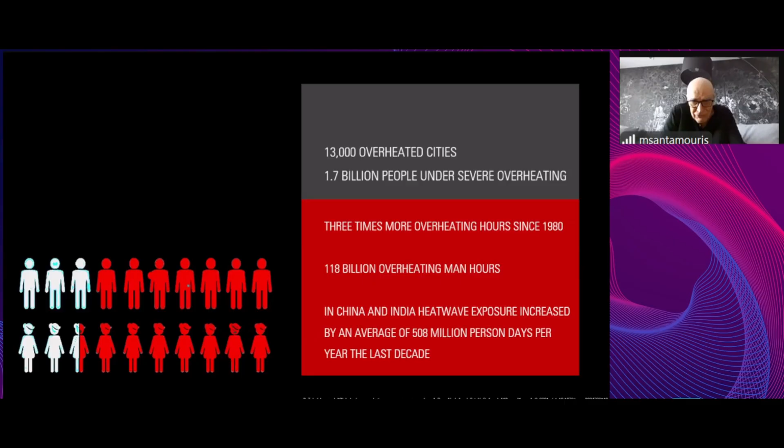Next one, please. To understand the impact of regional or urban overheating compared to global climatic change, I made the following graph. I just plotted the number of cooling degree hours in a coastal meteorological station in Sydney, which is not influenced at all by urbanization.

In the 90s, the number of cooling degree hours in that station was close to 820. In our days, the number of cooling degree hours in the same station, without urbanization, has increased by about 33%. This is the impact of global climatic change. But once we move into the center of the city of Sydney, the number of cooling degree hours increased by 81% compared to the coastal station. And this is the impact of urbanization.

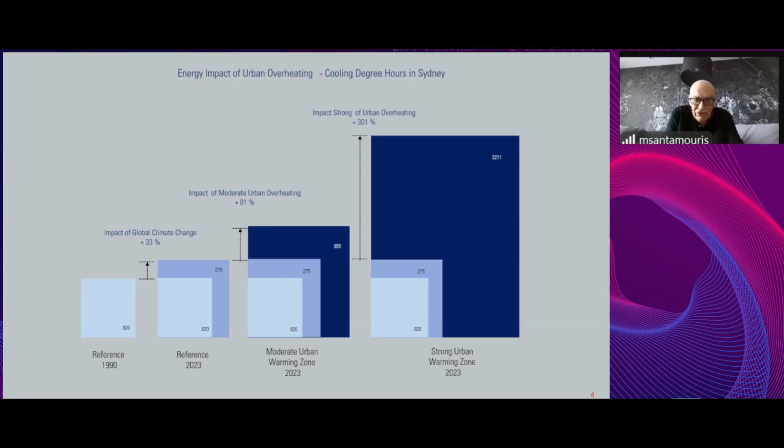And unfortunately, when we calculate the cooling degree hours in the western part of Sydney, which presents the highest problem of overheating, the number of cooling degree hours increased by 300%. So you understand that in a city, within a distance of about 50 kilometers, we have a tremendous difference in cooling degree hours or cooling needs or overheating. The impact of global climatic change is close to 30%, while the real impact of the local climatic change of city overheating is close to 300%. Next one, please.

Which is the impact of the higher temperature in cities? First, it increases the energy consumption for cooling purposes. Also, it decreases the efficiency of power plants. Another very important problem has to do with the increase of peak electricity demand, which obliges utilities to build additional power plants. It also has important environmental problems: it increases the emission of pollutants from power plants, increases the concentration of ozone, and affects heat-related mortality and morbidity, as well as mental health problems.

But it also has an important impact on our social life, because it lowers the productivity of the population, increases the risk of accidents, and affects the survivability of vulnerable populations. Next one, please.

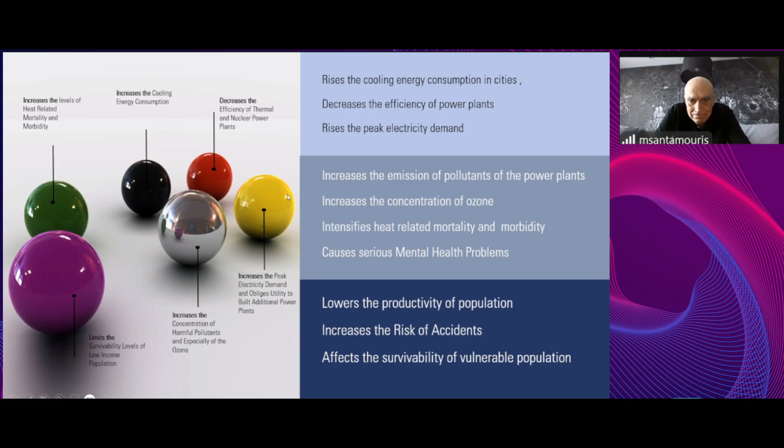Do we have enough evidence about the impact of urban overheating? Yes. As it concerns energy consumption, we know that on average, urban overheating causes an energy penalty close to 240 kilowatt-hours per person. In some cities the penalty is higher, in others a little lower. So each one of us has to pay close to 240 kilowatt-hours per person because of the overheating of cities. On the other hand, peak electricity demand is increasing tremendously because of the very important penetration of air conditioning during the hot period.

This obliges utilities to build additional power plants to satisfy the demand, and of course this increases the cost of electricity. At the same time, we know very well that for each degree of temperature increase, the efficiency and power output of thermal and nuclear power plants decreases by 0.6%, which means that during a day of heat wave, the decrease of efficiency of power plants is really close to 6%, which is really very, very high. Next one, please.

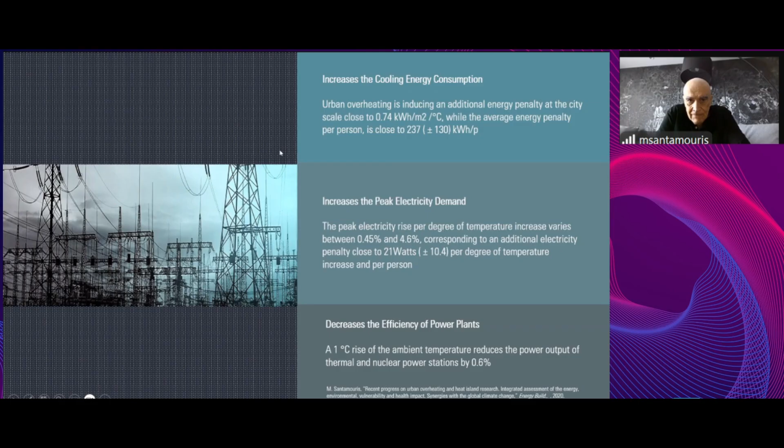The problem of higher demand for electricity during heat waves started to be a very serious problem during the last period. Why? Because during heat waves, most nuclear and thermal stations have no possibility for cooling, since the temperature of the rivers and lakes used for cooling increases and cannot be used for that purpose. Under these conditions, the output of these stations is very limited or even zero, and this results in a tremendous increase in the price of electricity.

During heat waves in the last few years in Europe, the spot price of electricity per megawatt hour increased by about 10 times during these periods, and of course this cost is transferred to the consumers.

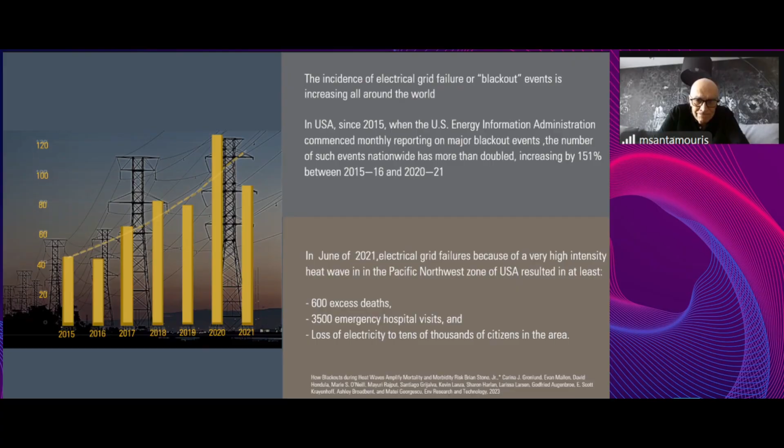As part of the energy problem, urban overheating very much affects the concentration of pollutants in the atmosphere, mainly ozone. This is the result of photochemical reactions in the atmosphere, which are accelerated by high temperature and high solar radiation. Ozone is a toxic gas that creates a serious problem and perhaps a very serious number of deaths per year.

According to the World Health Organization, we may have about 600,000 additional deaths per year because of the increased concentration of ozone in the world. Next one, please.

Apart from the serious increase in ozone concentration caused by urban overheating, the extended use of power plants increases the emission and release of pollutants by the power stations. For each degree of temperature increase, the release of pollutants by power plants increases by close to 3.5% per degree, which means that during a day with overheating of 10 degrees, we may have 35% more pollutants emitted by power plants. Next one, please.

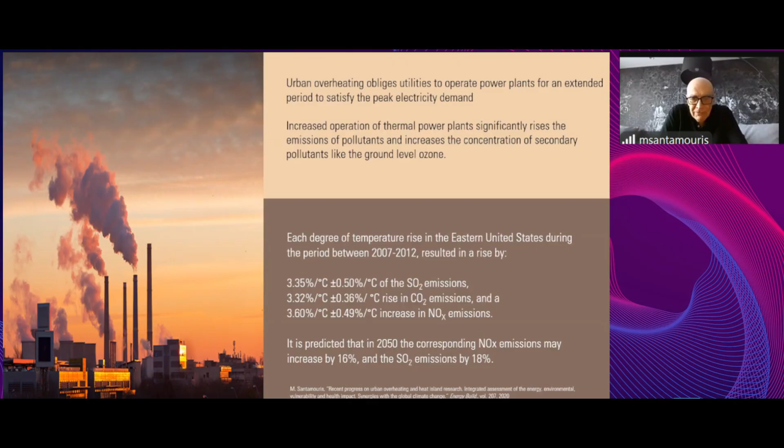So unfortunately, the energy and environmental problems are not the only problems we face because of overheating. The problem faced by the low-income population caused by high temperature in cities is a very serious problem. Unfortunately, low-income population lives in deprived urban areas with very high overheating. Also, the quality of housing for low-income population is not proper, and this creates an important indoor overheating problem. The lack of resources to compensate for the overheating puts these people under stress.

It's characteristic that in Portugal, a very developed country of the European Union, low-income population can cover only 2% of their cooling needs. Next one, please.

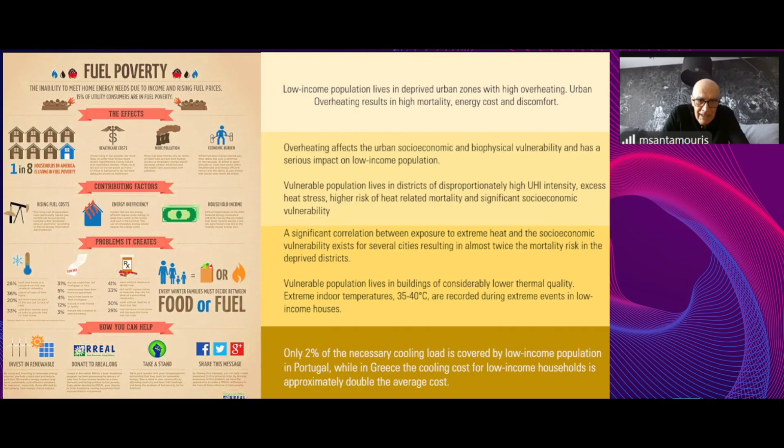A lot of measurements and monitoring campaigns performed in low-income households during heat waves or warm periods have shown that low-income population is living under very high temperatures. You see, for example, results of recent monitoring in Western Sydney, showing that people used to live under 40 degrees during a heat wave.

Unfortunately, because they try to protect themselves by closing doors and windows, the indoor concentration of pollutants was 3 to 4 times higher than the threshold. So because of overheating, low-income population is living under tremendous stress, very high temperatures, and also very high indoor pollution. Next one, please.

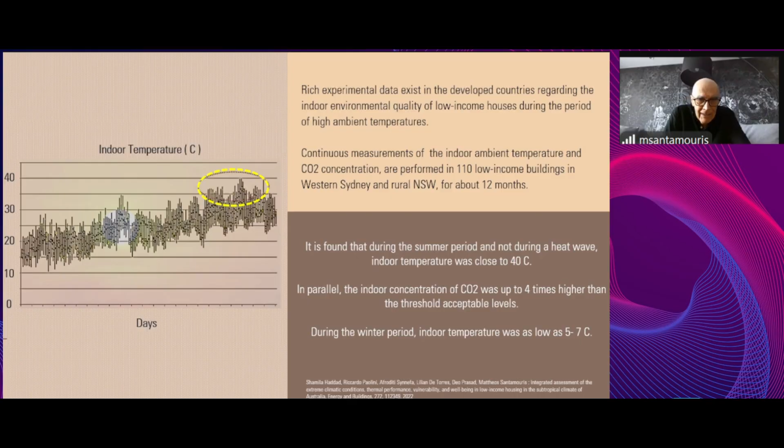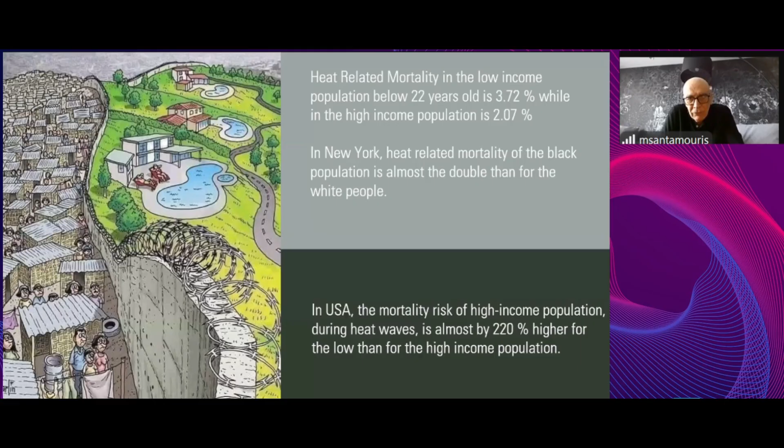This brings us to the very serious problem of the impact of overheating on health. We know very well that when the human body is exposed to temperatures beyond a certain threshold, the thermoregulation system cannot offset the impact of extreme heat, and this results in increased global mortality and morbidity.

Who is really affected by that? Elderly and young population are the most vulnerable groups. Also those with pre-existing health problems like respiratory, cardiovascular, or mental health problems, those using medication, and those who lack economic assets and local infrastructure.

Is heat-related mortality and morbidity because of overheating a serious problem? Yes. In Europe, heat-related mortality for the population above 65 years old has increased by 85% between 2004 and 2021. So this is a very serious problem. According to the World Health Organization, the magnitude of heat-related mortality in the world is close to 500,000 persons per year. So we are losing 500,000 people per year because of overheating.

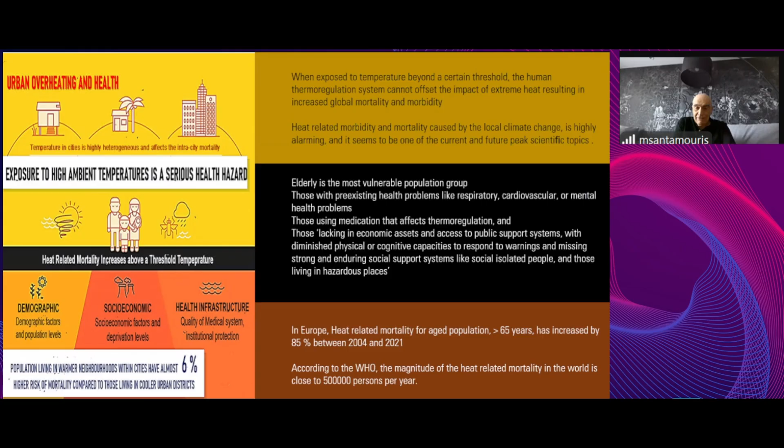What about the future? The actual forecast by official institutions in the world shows that in Southeast Asia, South America, Africa, and South Europe, there is going to be a tremendous increase of heat-related mortality because of overheating. This has to do with many parameters, and we hope this will not happen. But unfortunately, the continuous increase of temperature, the overpopulation, and the lack of proper standards in these areas bring us to such a high number.

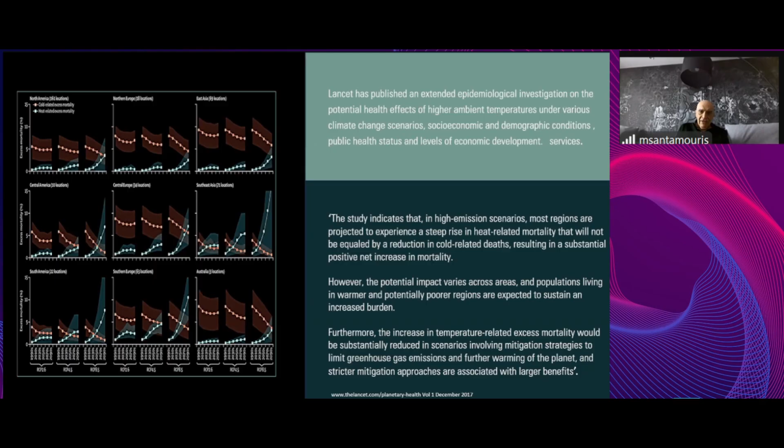Let's say that this is going to be one of the major problems in specific areas. We know that during periods of high temperature, human aggressivity increases tremendously. The number of crimes committed during hot periods increases by a factor of 6 or 7 compared to the rest of the year.

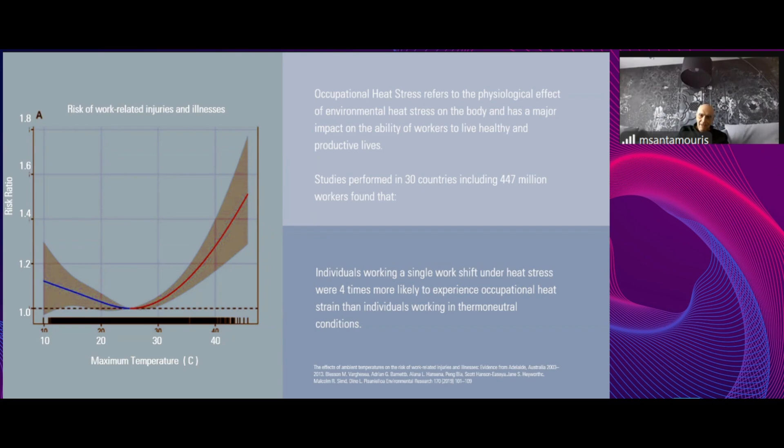Just to understand the impact of the economic and financial loss from overheating and loss of working time: in the United States, they are losing about 100 billion annually from heat-induced loss of labor productivity. And it is expected that the economy will have about 23% lower income by 2100, by the end of the century, because of decreased labor productivity. This mainly happens in the third countries, the less developed countries, where people work mainly outdoors.

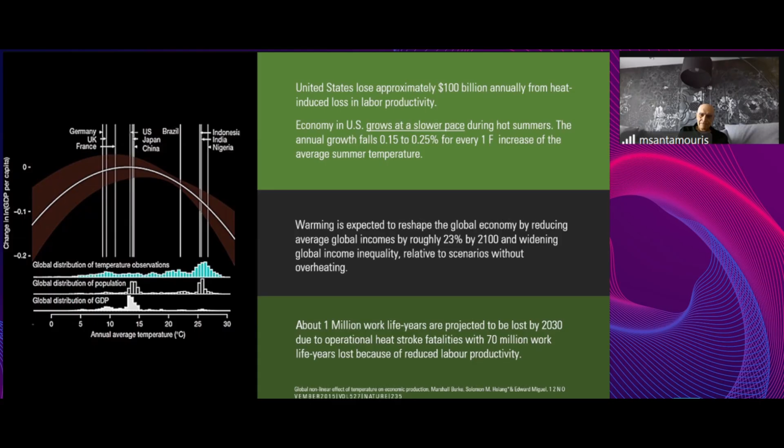Recent studies performed using many millions of people have shown that human productivity is decreasing by about 60% above 30 degrees. When temperature is higher than 30 degrees and goes close to 40 degrees, which is very common in Southeast Asia, human productivity may decrease up to 60%. So it is very simple to understand the economic impact this has on countries and also on families because of the loss of productivity.

A very recent study by the International Labour Organization showed the total work time expected to be lost, especially in the developing countries, because of overheating. Officially, according to the International Labour Organization, temperatures close to 40 degrees, very common in cities in Southeast Asia, may cause a decrease of by 70%.

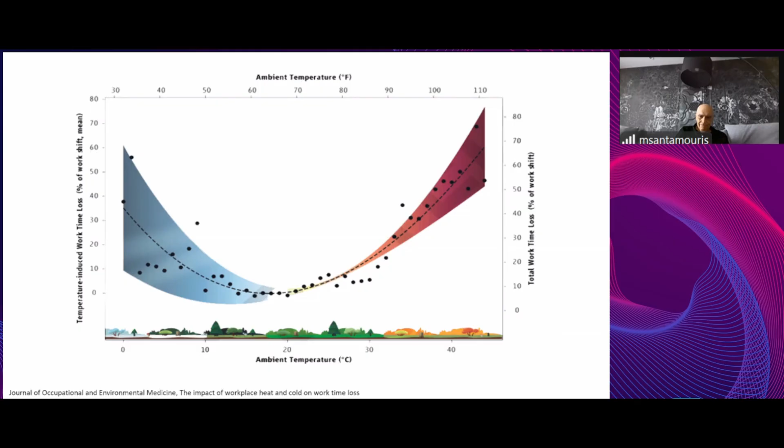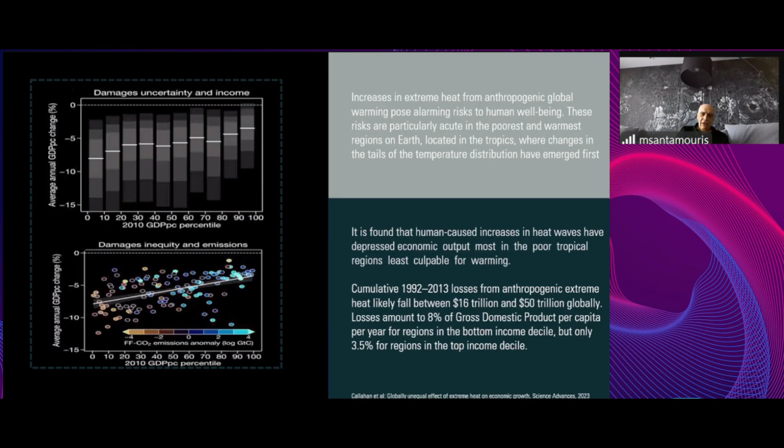Unfortunately, this affects mainly countries with less income, developing countries, countries that are not responsible for climatic change. So those that are paying the penalty of climatic change are those that are not responsible, that have not caused the problem. Recent forecasts show that these countries will be affected financially, but not only financially, also from the social and technological point of view in the future.

What about the future? The actual forecast we have about future temperature in our cities shows that we may expect an increase of the nighttime temperature between 3 to 5 degrees, not the same everywhere, but this is the average. And also, we are expecting an increase of the daytime temperature between 1 to 2 degrees. So in the future, we may have much higher temperatures during the night, and higher temperatures during the daytime as well.

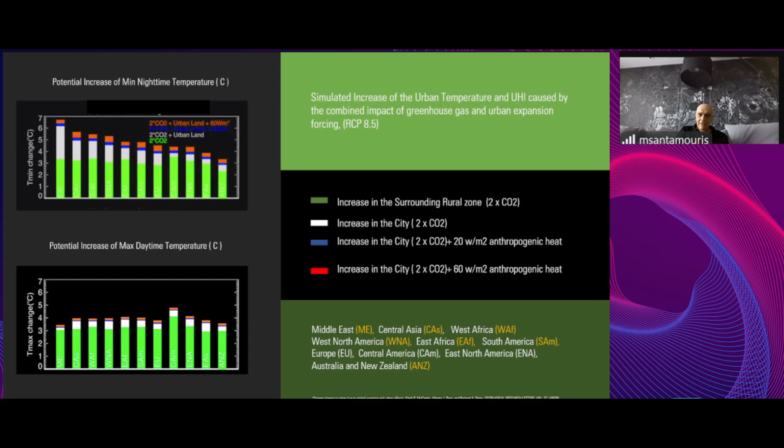This brings us to a very serious problem regarding mainly low-income population. Why? About 9% of the global population is living out of the so-called human climate niche, which is the range of temperature where human civilization developed. 9% of the global population today is living outside this range, under temperature conditions we never had before. And of course, this may increase up to 40% in the future under specific conditions.

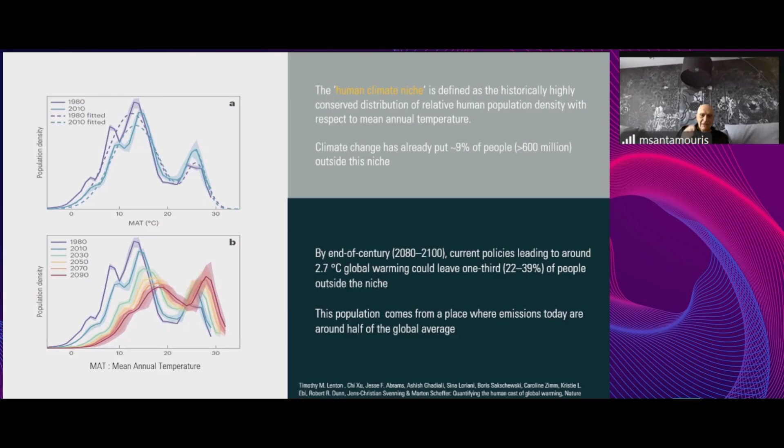This will happen in very specific countries: India, Nigeria, Indonesia, Philippines, Pakistan, etc. In these countries, we may expect a tremendous increase of the temperature, because of the combination of the global and local climatic change.

This will affect mainly low-income population. Just to understand, in the countries and cities of Southeast Asia, we have about 86 days on average above 35 degrees. An increase of the temperature by 2 degrees will increase this figure to about 105, or an increase by 3 degrees, very probably, to 134.

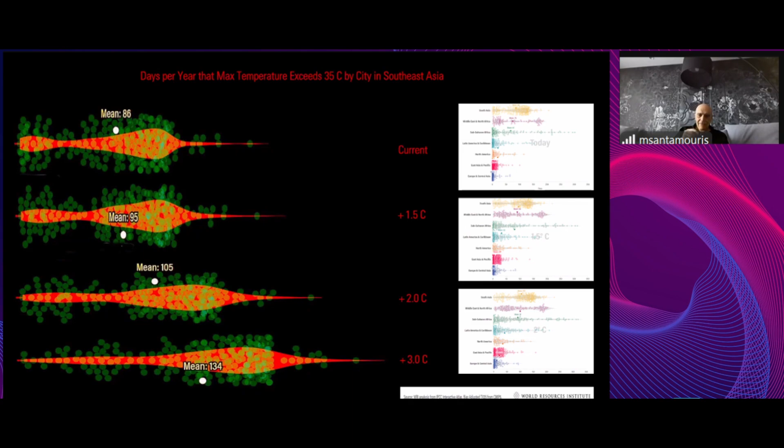But this is going to affect mainly the low-income population, because low-income population experiences 83 days above 35 degrees, while high-income population has only 16 days above 35 degrees. So the problem is that in many cities in Southeast Asia mainly, but not only Southeast Asia, we expect a tremendous increase of the temperature. We expect also a very serious problem for low-income population.

Under different scenarios, the situation may be extremely serious, but we like to believe that these scenarios will not really happen, because it shows that perhaps the increase of the population living outside the actual temperature range in Southeast Asia may increase by 150%.

I hate this forecast, but unfortunately this brings us to the reality of the actual construction situation. There is currently a shortfall of about 330 million homes in the world. And in our days, this has increased to about 440 million. We build a lot, but we don't build with the proper standards. To understand really how much we build, I have to tell you that we add a total floor area equal to the city of Paris per week.

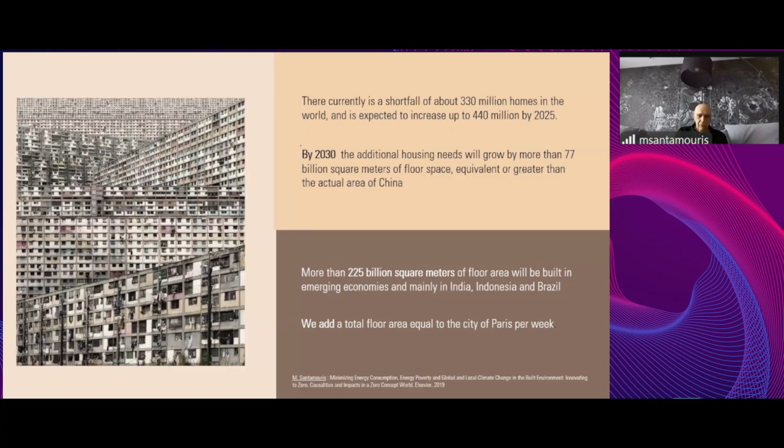And many people just mention that, okay, higher temperatures, low-income population, no problem, we have air conditioning. Actually, air conditioning is not really an important part of the building's energy balance. It's about 14–15%. But by 2050, it is expected that the need for air conditioning may increase up to 2,000%. Why? Because of the overheating and because of the overpopulation.

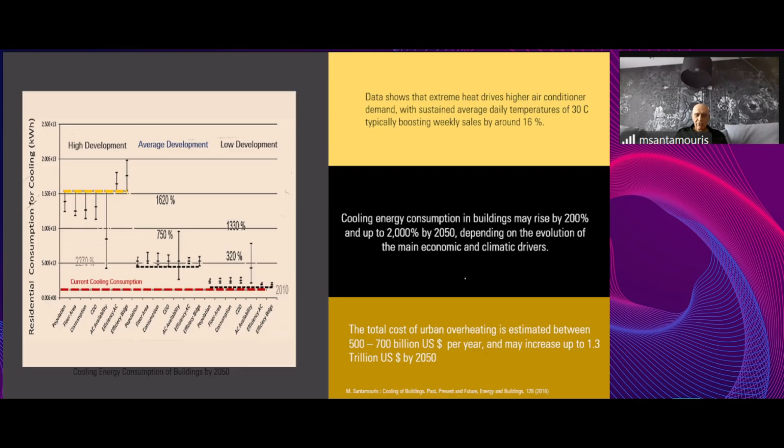Forecast shows that the total cooling energy consumption of a single Indian city, Mumbai, may be higher than the total electricity consumption of the whole United States. So you understand what is going to happen in these cities, and I will come back to this and explain to you what is happening today. Next one, please.

And other very recent studies have shown that in low-income population, the penetration of air conditioning, these are results from Brazil, is almost zero. They try to cool their houses or to have access to comfort using other techniques. So air conditioning is not really a solution for the low-income population and cannot compensate the tremendous increase of the population and also the tremendous increase of the overheating. Next one, please.

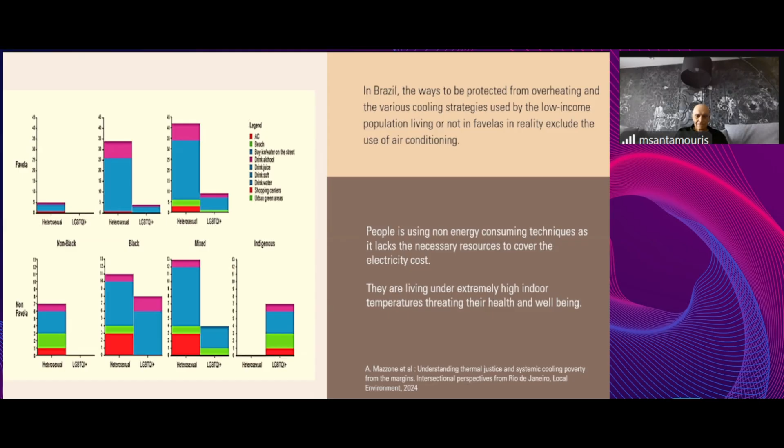And of course, this creates a tremendous stratification in the world. Countries with higher income pay much less. The cost per family is much lower than in the countries with lower income. And why? Because of the quality of the electricity infrastructure, the quality of the housing, and many social, financial, and technological problems. The cost of air conditioning in the low-income countries is much, much higher than in the developed countries. Next one, please.

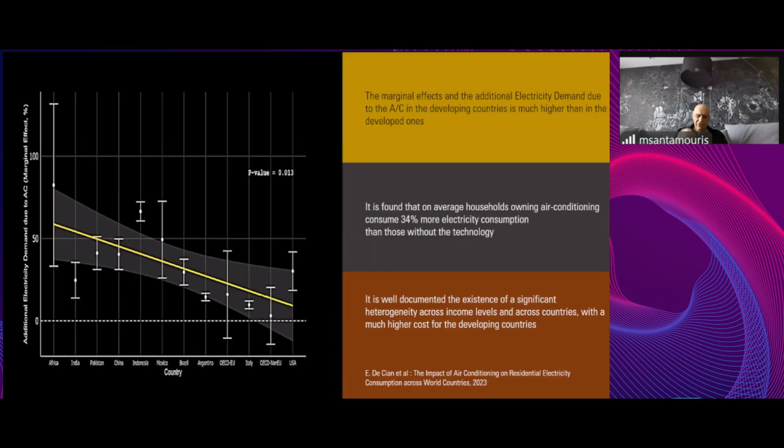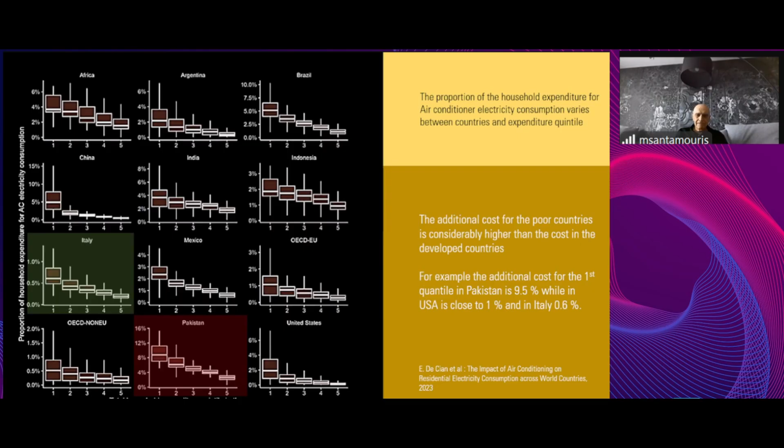Because speaking about the future, some people may say, okay, we believe or we don't believe. I'd like to show you what is actually happening in India. In India, since April 2023, and in most parts of Southeast Asia, there is a continuous heat wave, very high temperature. Because of the very high temperature, low-income population tried to have access to comfort. And it's not so difficult or expensive to buy an air conditioner because of the market created by the air conditioning industry. You can easily buy an air conditioner. The problem is how to operate it.

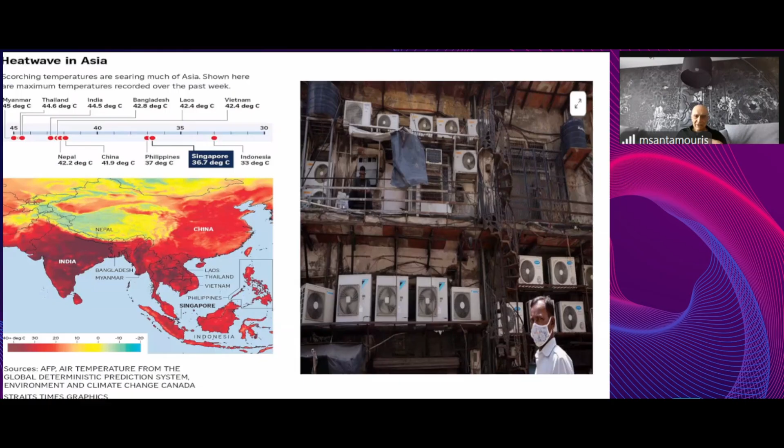Next one, please. As a result of this tremendous penetration during the last 2 years in India, the peak electricity demand in India has increased by 15.2%. This is an incredible percentage. There is no country in the world that can increase its capacity and power output by 15.2% per year. 15.2% per year new power plants.

Who can do that? What is the cost? Which kind of fuel? What is really the total cost of electricity? What about the emissions? What about the release of pollutants? It is impossible really to continue this way. As a result of this tremendous increase of electricity caused by the penetration of air conditioning, next one please. No, previous, can you go back one?

Thank you. The provision of electricity in Indian cities during heat waves is just for 3 or 4 hours per day. So you understand that you can buy an air conditioner, but you don't have electricity, because the tremendous infrastructure which is required, the tremendous cost, and the failures of the grid do not allow it to provide comfort. So air conditioning is not really the solution for the future if we don't have other proper measures at the same time. These are the bad news.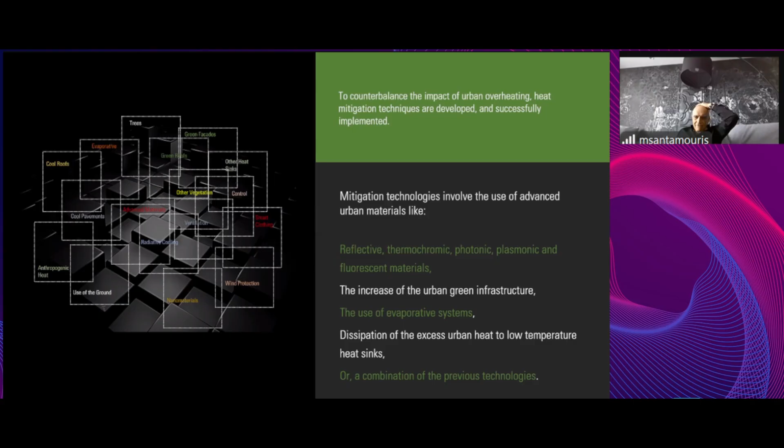But I would like to refer to very recent developments related to the development of the so-called supercool materials. These supercool materials, or photonic materials, are materials which present a very high reflectance to solar radiation, 96-97%, but the most important optical characteristic has to do with the emission of these materials. These materials emit in wavelengths corresponding to the atmospheric window.

The atmospheric window, 8 to 13 micrometers, allows the radiation coming from the ground to escape to space. So these materials can send the excess heat directly to space. So they can develop surface temperatures below the ambient one. Next one, please.

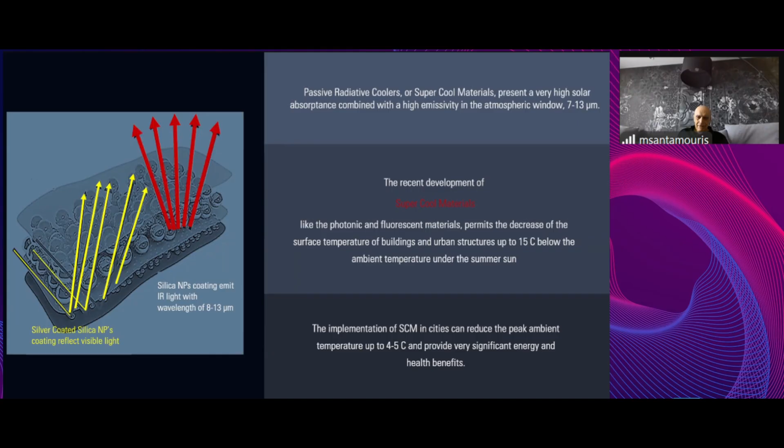At the University of New South Wales, we have developed these supercool materials. I don't want to go through the details. I would like to show the results. Next one, please. These materials are tested under Australian desert conditions. Very high temperature, very high solar radiation. Next one.

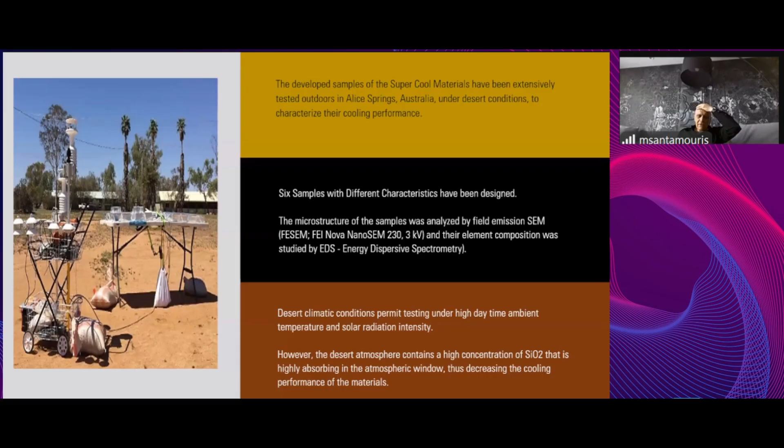And during the day, under the sun, during the summer, in the Australian desert, these materials present almost 6 degrees lower surface temperature than the ambient one. So these materials are natural air conditioners. Next one, please.

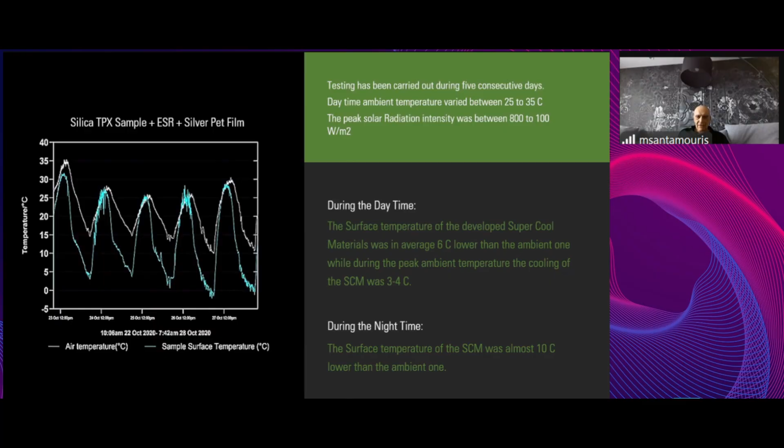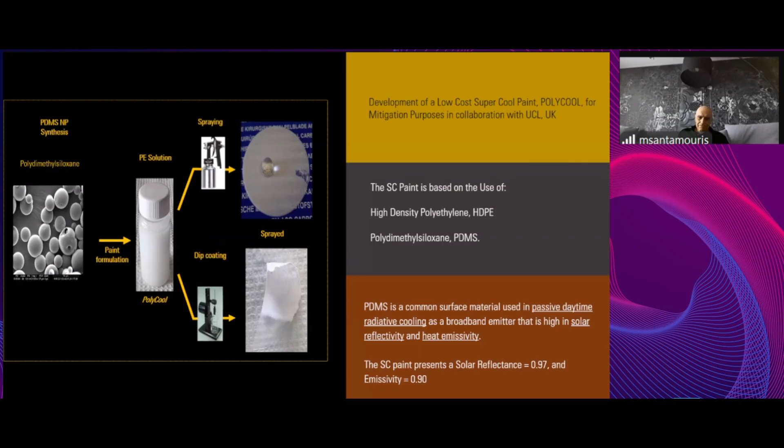And recently, together with UCL in London, we have developed very cheap supercool materials in the form of paints, which are also tested, next one please, and these paints applied on the roof of a house may present, under the sun during the summer, almost 7-8 degrees lower surface temperature, contributing to much lower indoor temperature and of course much better thermal comfort. Next one please.

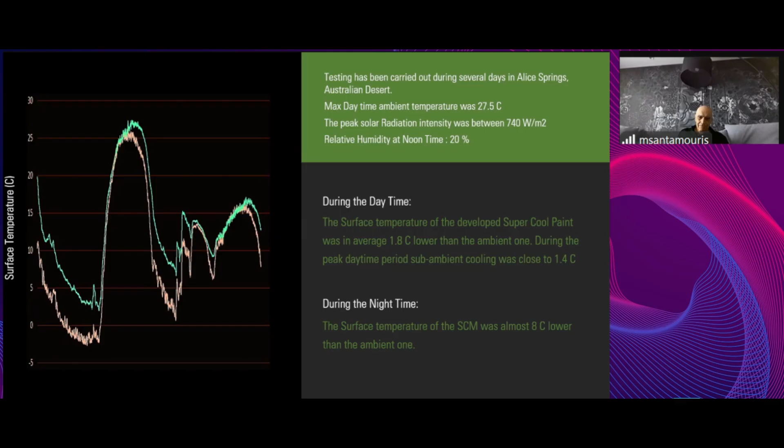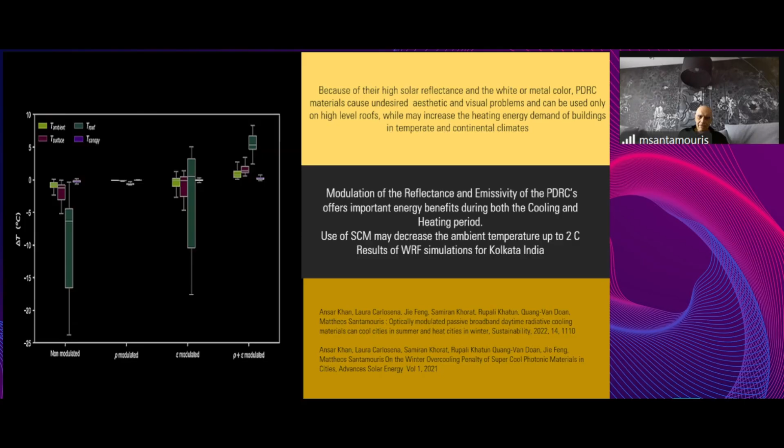Unfortunately, these supercool materials present very high reflectance. So these materials can be used only on the roofs of buildings, because if used on vertical surfaces they may cause problems of glare, contrast, etc. In order to solve this problem, next one please, we try to decrease the reflectance of the materials and compensate the loss of reflectance by using another cooling mechanism.

And we use fluorescence. Fluorescent materials absorb radiation, but immediately they emit most of the radiation in other wavelengths. So their thermal balance can be close to zero. The combination, next one please, of photonic with fluorescent materials gives us colored photonic supercool materials. Materials which have any color you may wish and present much lower surface temperature. Next one please.

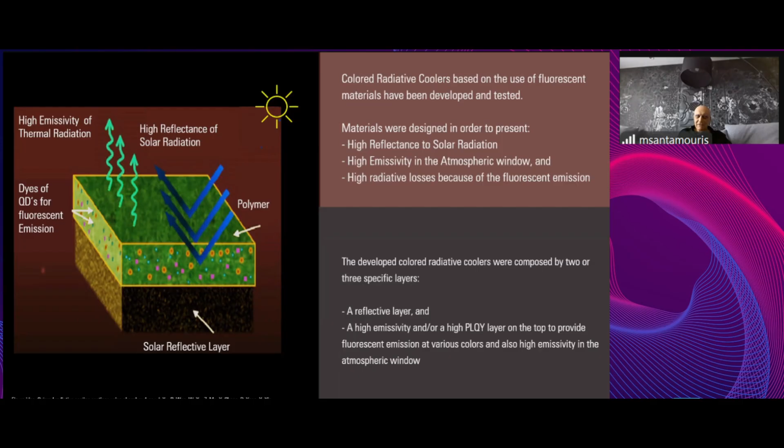We have tested this material under the Australian desert conditions, and you can see, for example, that a colored material, for example, a green material, presents almost the same surface temperature as a white, high reflectance photonic material. So now we can have color materials which present 8 to 9 degrees lower surface temperature than the ambient one.

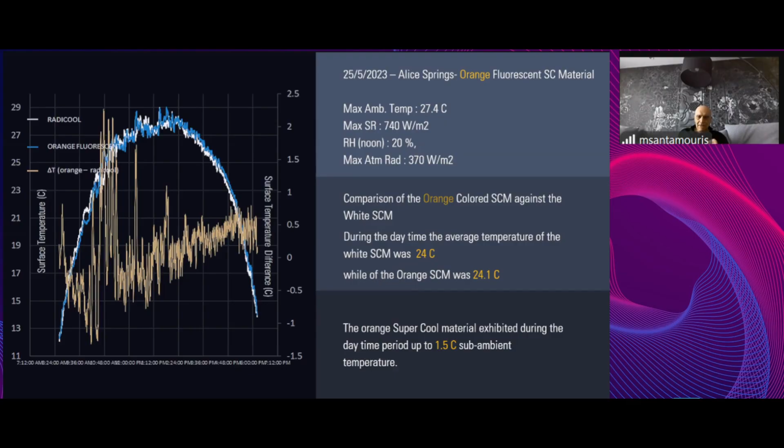And these materials, next one please, present, for example, an orange material, which usually is much warmer than a white material. These materials presented 3 degrees lower surface temperature than a conventional white. So you understand that these materials may be used in cities really to decrease their surface temperature and also their ambient temperature. Next one, please.

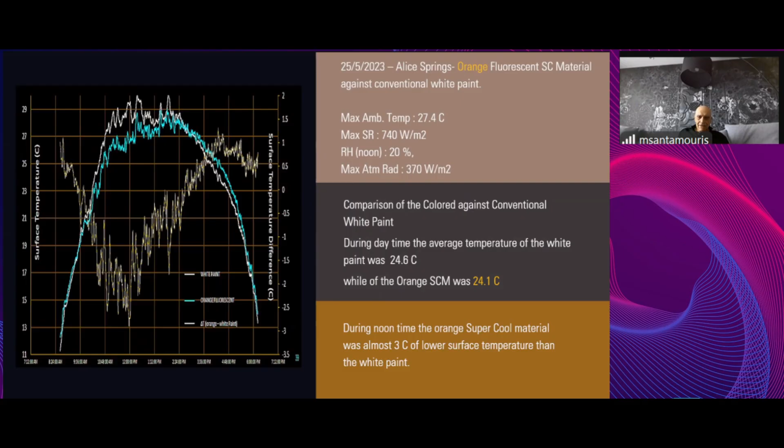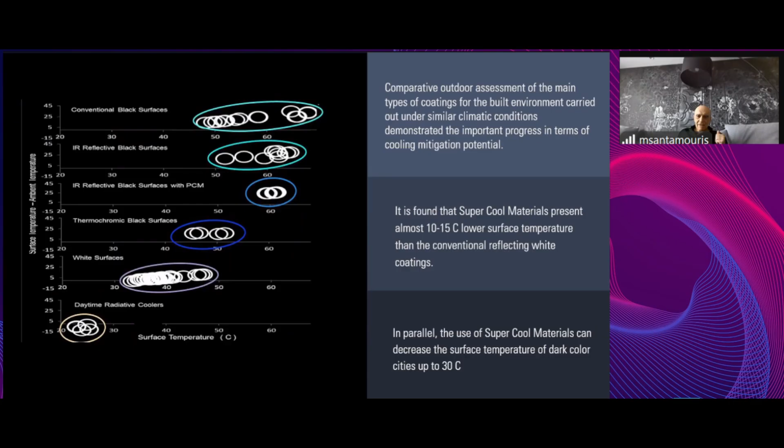So while 20 years ago the surface temperature of cities was quite high, you see in the upper part of the graph, now we really have the technological developments to decrease the surface temperature of cities up to 15 or 20 degrees. So this is a major achievement. And you may ask me, next one please, if we have any implementation of these technologies.

Actually, in Riyadh, Saudi Arabia, we are responsible for the whole mitigation plan of the city. We have designed, and now it is under implementation, the use of the supercool materials on the roofs of the buildings, on the whole area of the center of Riyadh. According to our calculations and the first measurements, we are able to decrease the peak temperature of the city in Riyadh up to 4.5 degrees. So this is the highest decrease of the temperature in a city.

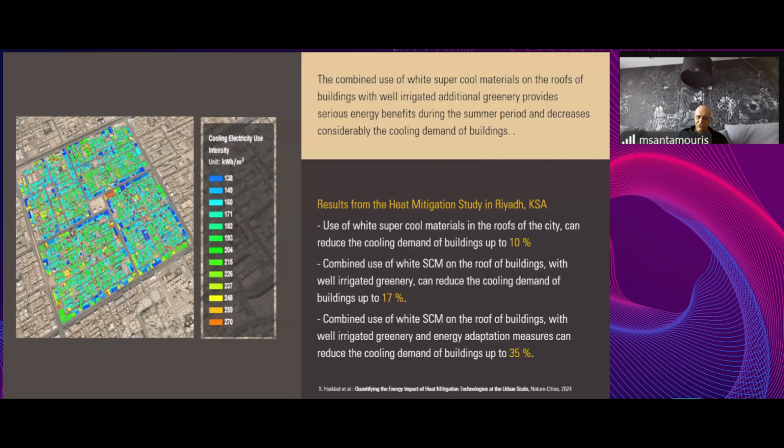Next one, please. And our calculation, building by building, showed that the implementation of these materials and these techniques in buildings may decrease the energy consumption in Riyadh, a very, very hot city, up to 35%. Next one, please. But also, similar studies performed for the Ministry of Energy in Australia showed that the implementation of these technologies in Sydney may decrease the peak cooling demand in Sydney between 30 to 50%.

Next one, please. But the most important, in my opinion, development and impact has to do with the decrease of the temperature of low-income houses. These are experimental results that show that when these materials are used on the roof of a low-income house in the desert, in the First Nations of Australia, or in Western Sydney, they decrease the peak indoor temperature during the summer up to 10 degrees.

So instead of having people living under 40 degrees or even 45 degrees, we decrease the temperature with a minimum cost down to 30, providing comfort and saving lives. Next one, please.

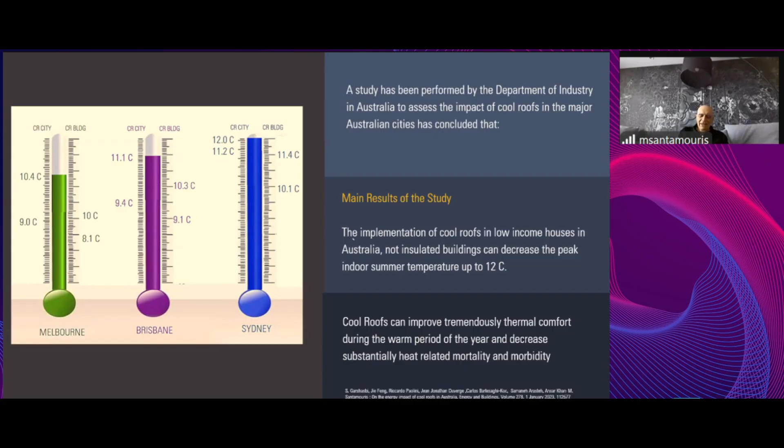What about the future? I tried really to describe to you the very recent developments. I'd like to refer to the recent letter sent by the director of NASA to Nature journal. According to the director of NASA, the overheating rate was 0.2 degrees per decade. Unfortunately, since 2023, the overheating rate, or the increase of the temperature, is 0.2 degrees per year.

According to the gentleman, we are in uncharted waters because we don't know why this happened. There are several explanations; we don't have to go through that. But this is what really happens. There is a tremendous acceleration of the overheating in our cities in the world, despite the belief of some people that there is no climatic change. Next one, please.

Is technology the only tool we have to use in order to mitigate and adapt to climatic change? No. Technology is very important, but it's not enough. Technology has to be combined with financial and social measures. Actually, in our world, the implementation and the penetration of the new technologies is not only a function of performance, it is also a function of some financial indicators.

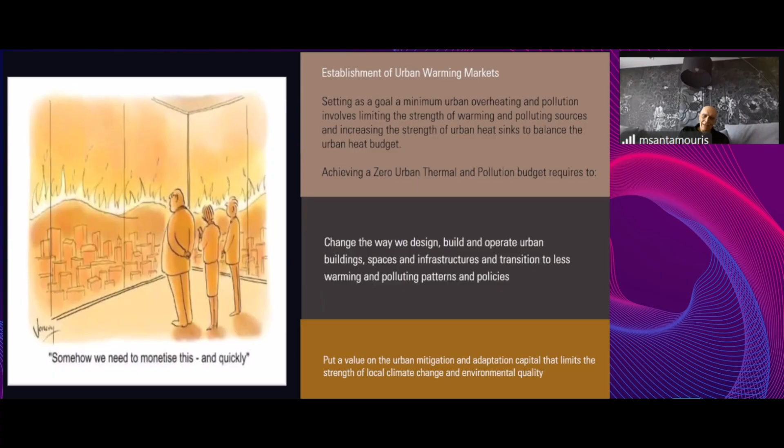that we have to develop a financial mechanism in cities where those who cause extreme or excess warming have to pay for this cost. If your municipality uses black asphalt and increases the temperature, if a new developer builds a new settlement and increases the temperature, they have to pay for the cost. And those in the city who really decrease the temperature by planting trees, by using proper materials, have to gain these benefits.

So by creating such a financial mechanism, the monetization of the overheating will accelerate the penetration of new technologies. I'd like to conclude. Overheating is a very serious problem. I tried to present the main impacts, show what will happen in the future, and also present the positive developments we have. But we have to understand it's not just a technological problem. It combines financial, technological, and social issues, and we need a holistic approach for the future. Thank you so much.